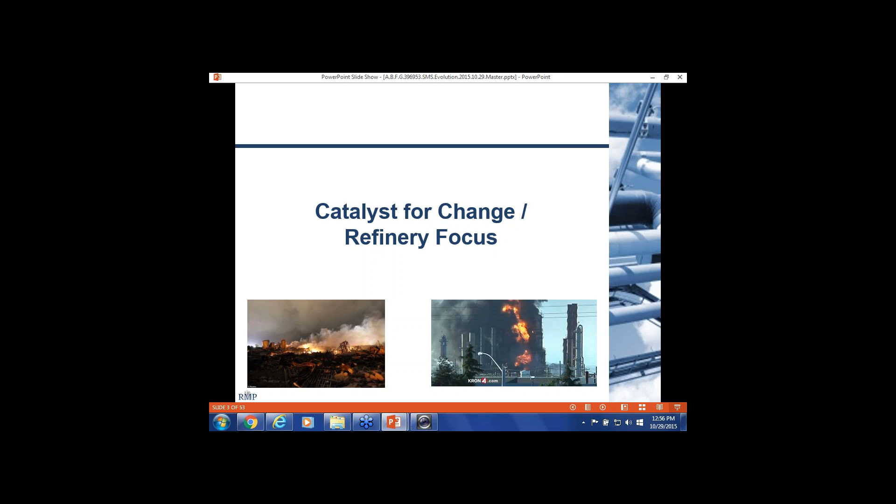All these things need to get looked at over time. The West Texas event and the Richmond refinery fire were just the catalysts for doing that. It was probably something that has been in the background for a long period of time, and that's just the focal point. What I'd like to do is talk about two key platforms for where these things are coming from.

First of all, as I mentioned, there are 3 CSB reports. The first one came out fairly quickly. I was going to say from an agency perspective, it takes a lot of time to get approval on these, but still in 2013, CSB came up with recommendations already for some of the key deficiencies in management systems that they perceived or what could be considered areas for improvement.

Additional PHA requirements regarding safeguards effectiveness, inherently safer systems requirements, damage mechanism hazard reviews is what they called it at the time. Coordinating regulatory programs, leading and lagging process safety indicators, and also a multi-agency involvement in California regulatory environment. All these should sound familiar because that's a key fundamental aspect of what's going on right now with the CalARP and also the PSM changes in California.

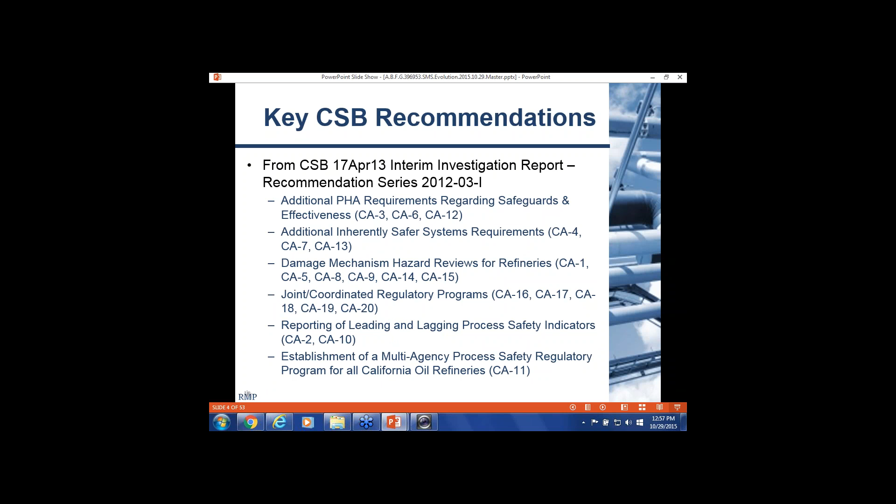In 2014, the second report came out from the CSB that was focused more on regulatory issues. There was a recommendation for restructuring California PSM regulations. You're seeing the results of that right now. Augmenting the PHA to include hierarchy of hazard control analysis, damage mechanism reviews, and also making sure MOCs trigger a fresh look at inherently safer systems. All those are being brought forth in various fashions in the CalARP Program 4 and Cal PSM 5189.1 documents.

Regulatory personnel review, make sure that there's technical competence in the review of those things. PHA audits and inspections by the regulator, workforce participation, making sure information is reported to the public, and also regulator funding were all part of this regulatory report done in 2014. Also in 2014, looking at leading and lagging process safety indicators. You saw that earlier, but this was a different emphasis. And also, again, regulator compensation and funding.

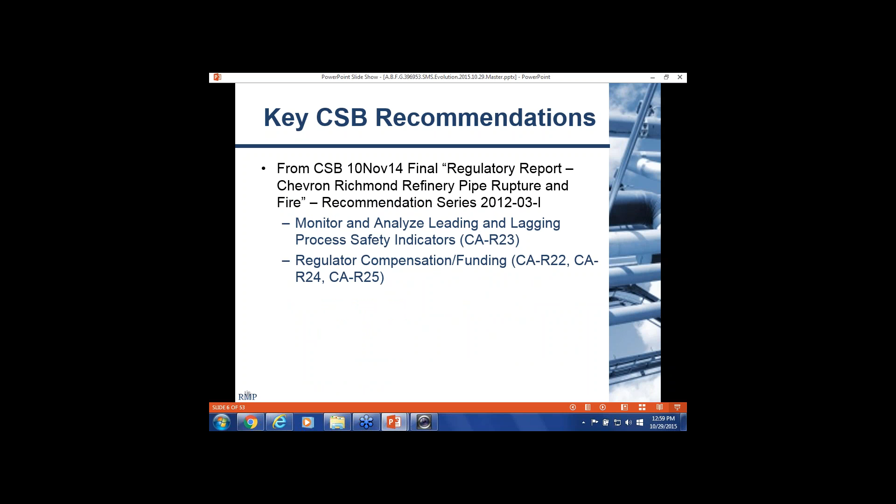In early 2015, early this year, there was the final investigation report. A key part of that was focused on damage mechanism reviews and mechanical integrity of basic equipment. By that time, the CSB had looked over various API reports and guidelines addressing specific corrosion mechanisms that had been part of the Richmond refinery fire initiating event in 2012, looking at various damage mechanisms. So all these different API recommended practices, they took a fresh look and said, well, look, these need to be updated to address these things, and there needs to be better application of them.

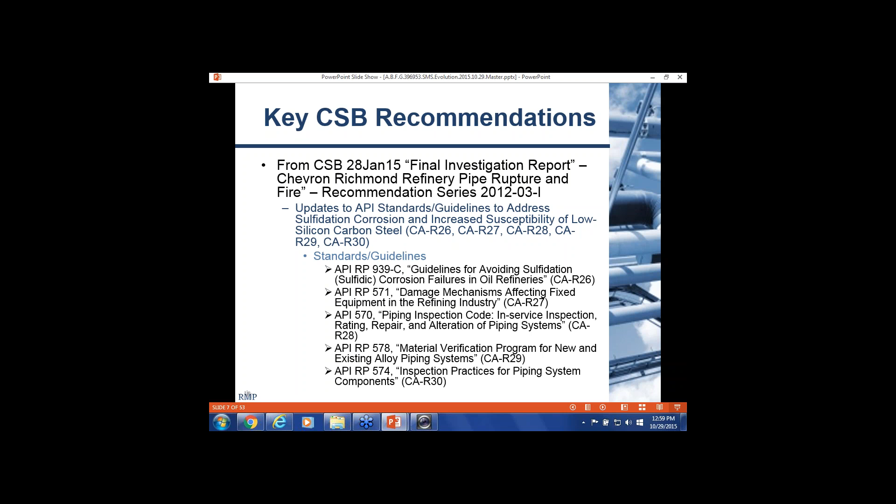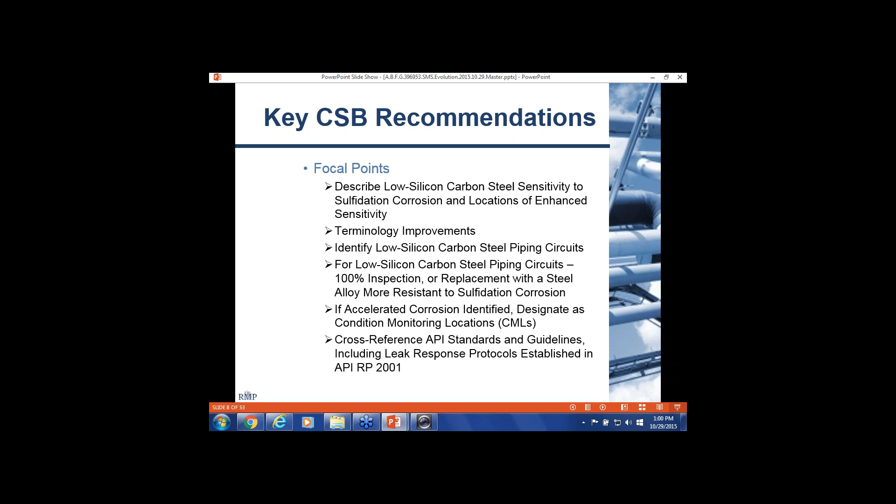And I've made a list here. That's also in your presentation materials for your reference. The key focal points from the CSB are the low silicon carbon steel sensitivity, improvements to terminology, looking at other metallurgy and corrosion mechanisms, and basically bringing this into play in the guidelines and also applying them better at facilities. Other recommendations were with respect to emergency response and also repair of equipment and piping. All these things also came out in the last report from the CSB.

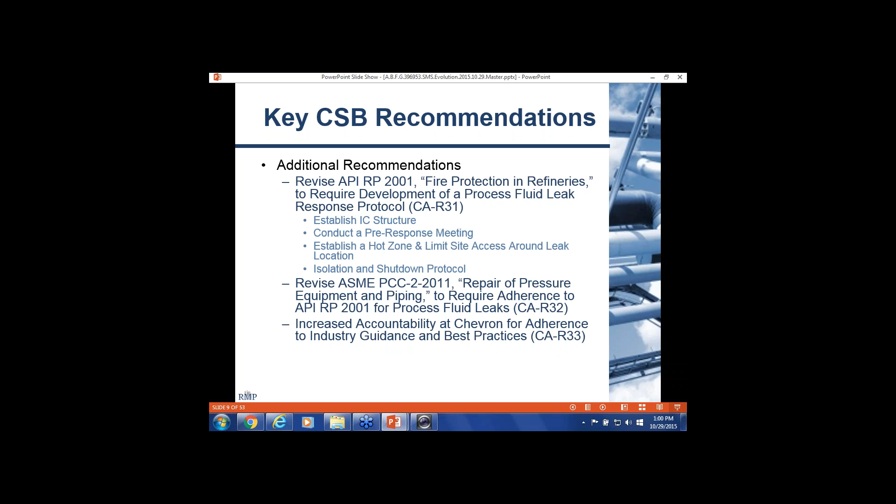Auditing and taking a fresh look at things at specific refineries, having an approval process at Chevron for resetting the minimum alert thickness to a lower value, that's alert thickness on piping or equipment. Again, specifically designed to address the sort of things that were perceived as deficiencies that led to or at least contributed to the August 6, 2012 event.

All right, so all these CSB recommendations, when you take a look at it, really provide the catalyst or impetus for change, and a lot of those changes are now being manifested in CalARP and the CalARP Program 4 and CalPSM documents. Also, the Interagency Refinery Task Force worked together.

That's those dozen-plus agencies that get together and are formulating the updates or helping CalOES, CalEPA, and CalOSHA formulate the changes to these programs. And they also put together their own report to look at the CSB recommendations and also a fresh look at other things and recommend the basis for the changes that are being made to the regulations.

Again, they focus on inherently safer systems, process safety culture assessments, damage mechanism hazard reviews, root cause analysis, human factors issues, and also make sure that safeguards are effective as part of the process hazard analysis. Other recommendations from the IRTF were annual compliance audits, increased frequency of agency inspections, it should say UPA now, it was CUPA at the time, and also an evaluation of the risk management plan on a triennial basis.

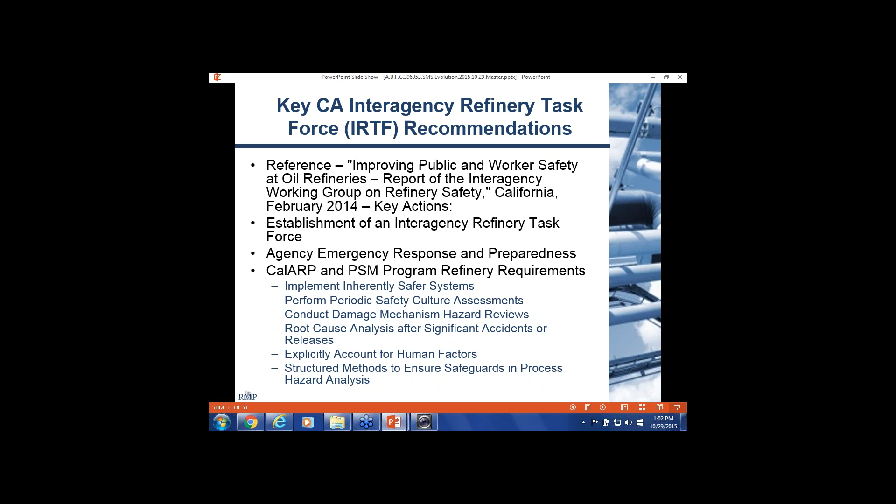Community education and alerts, and also agency enforcement, capacity, and reporting for refineries were also part of the IRTF's outcome that they published and is used as the basis for the CalARP and CalPSM changes. So that is the essence for what drove the changes, and what you're seeing right now in the CalARP Program 4 and CalPSM documents are a reflection of that.

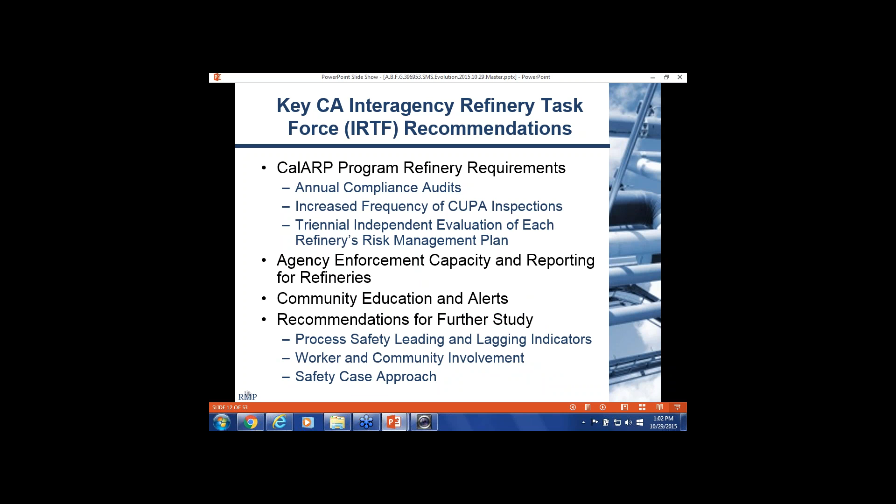And so what I'd like to do is look at each of the individual elements. Before we do that, I'd like to go ahead and identify where things are going. As I mentioned, at the federal level, they're still processing comments, so there's nothing that you need to act on associated with changes to PSM or RMP from the federal level now. Now, the problem is that it's going to be desynchronized with your state programs, but given that the federal requirements are much simpler, that shouldn't cause too many complications.

For CalOSHA, CalOSHA did issue on the 24th of September the latest draft of their PSM requirements for petroleum refineries, 5189.1, and the CalARP document in its entirety was updated with the key changes being Program 4 requirements. That was also done on September 24th. Again, even though there are differences, the section numbers are different, some of the elements are subsumed into different categories, specifically DMR, a lot of the agencies are working together to try to minimize those differences and at least have the technical essence of it synchronized.

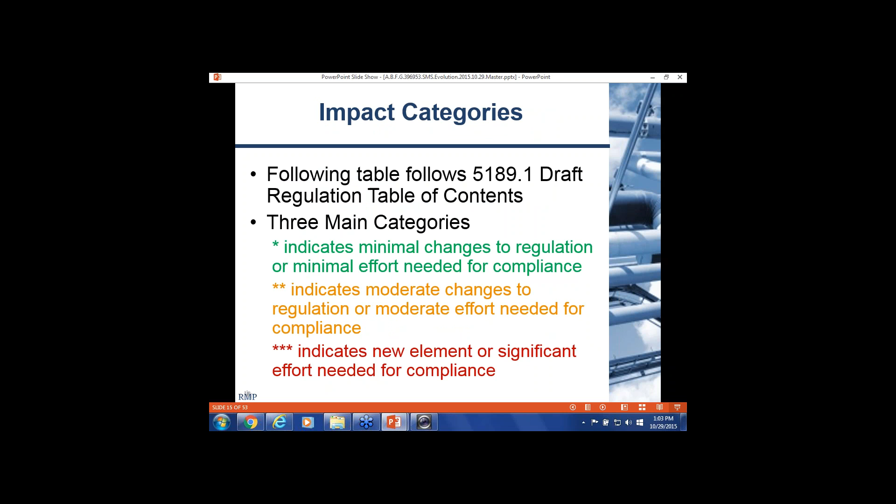I did provide a table of the different section numbers and importances that is provided as part of your presentation package. Again, it's color-coded associated with how much effort you need to spend on it, or at least anticipated effort, and depends on everybody's program, which is different. Yours may be better in some areas or not as good in other areas. The green items are things that you wouldn't expect a lot of effort on. The orange and red are things that you should pay particular attention to, with red especially.

The safeguard protection analysis, if you're not doing LOPA, or something else to validate the effectiveness of safeguards, that can have a big impact on what you do for your PHAs. We'll talk more about some tips on how to address that shortly. Damage mechanism reviews, again, there's a lot of ways to do this, but there's also a lot of things that you can do right now to minimize the amount of work that you have to do later.

Hierarchy of hazard control analysis, it's the same thing. Looking at inherently safer systems and how to improve the fundamental process at your facility can have a big impact, but especially if you're bringing new systems online right now, doing some work at this point can save a lot of retrofit or rework later. Process safety culture assessment, human factors, and management of organizational change, and also the management program itself, also things that could result in a lot of extra effort at your facility, and you want to pay particular attention to.

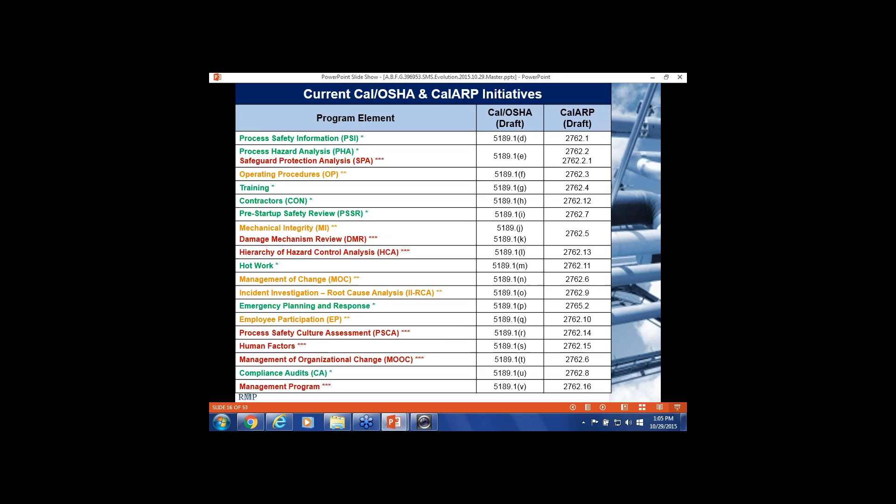All right, so with that overview, what I want to do is go ahead and turn it over to Jordan, who's going to start going through some elements. I'll pick up where he leaves off, and then we'll keep proceeding.

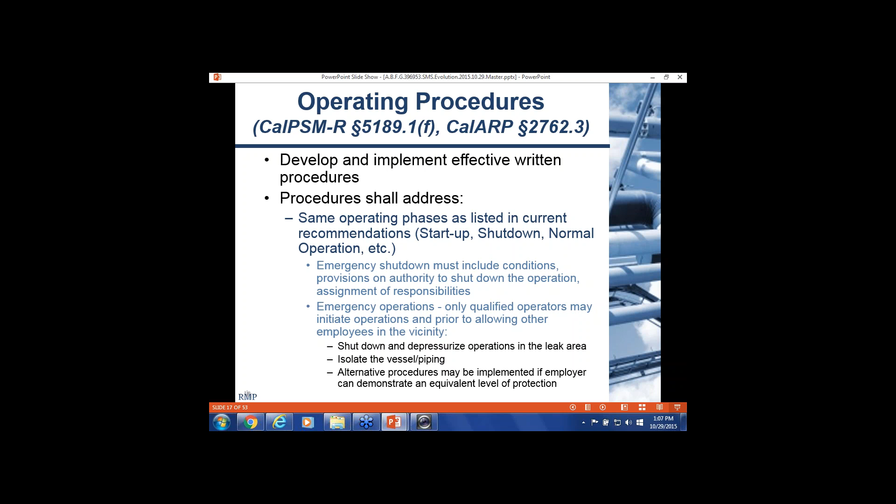Also, you've got to address operating limits. This is something that's kind of intrinsic in what's already in there. You have your operating limits as part of your PSI, but make sure they're actually on your operating procedures now. You're documenting the consequences of deviation, the steps required. This can all be done pretty effectively via one table, say like a matrix where you go, high pressure defined as blank. What happens if you hit that high pressure? This. Steps required, troubleshoot.

Safety and health considerations. This is once again part of your PSI, but the basis of that is that personnel don't always read through the entire CalARP binder. I know this is probably shocking to everyone that's actually involved in this program, but operators will look at the operating procedures, especially when they're first starting out. They want to say, here's what you need to know about ammonia, hydrocarbons, etc. What PPE do you need? That way they know all of this. Safety procedures, unique hazards, etc.

And also, what are your safety systems? Okay, you've got your PSVs. What are those set at? What is this alarm set point? So that way everything is all in one document rather than going back and forth between your PHA, your PSI, and your operating procedures.

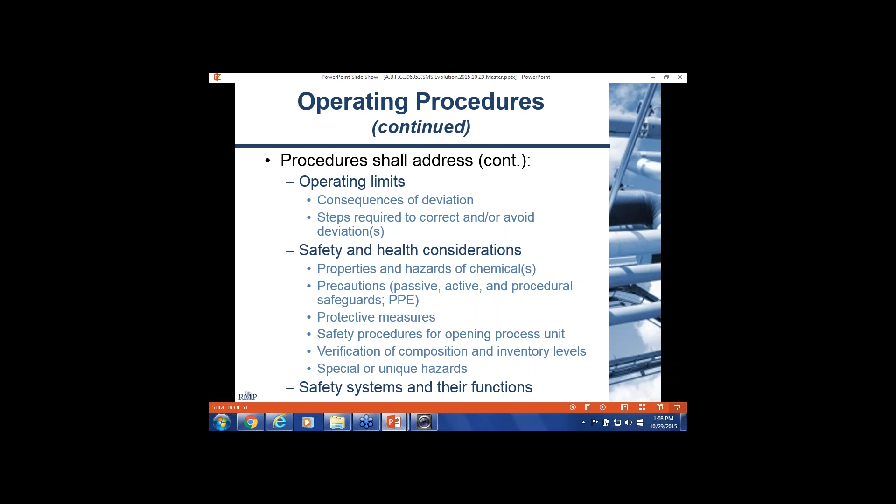A copy of procedures shall be readily accessible. This is a common practice, but it is explicitly called out. And you need to review and certify them, like we talked about earlier, annually, but they also say as often as necessary. If you're doing turnarounds, things like that, obviously you need to look at the way you're doing things. Whenever changes occur, same sort of thing. They want to make sure you're reviewing these not just annually, but whenever it's applicable. And develop, implement, and maintain safe work practices. This is explicitly called out as well.

Another one that is particularly different: control over entry at hazardous work areas. This is sometimes one that isn't really covered under safe work practices traditionally. Obviously, LOTO, confined space, and opening process equipment always is. But handling, controlling, and stopping leaks, as well as that control over entry into the areas, sometimes isn't always covered.

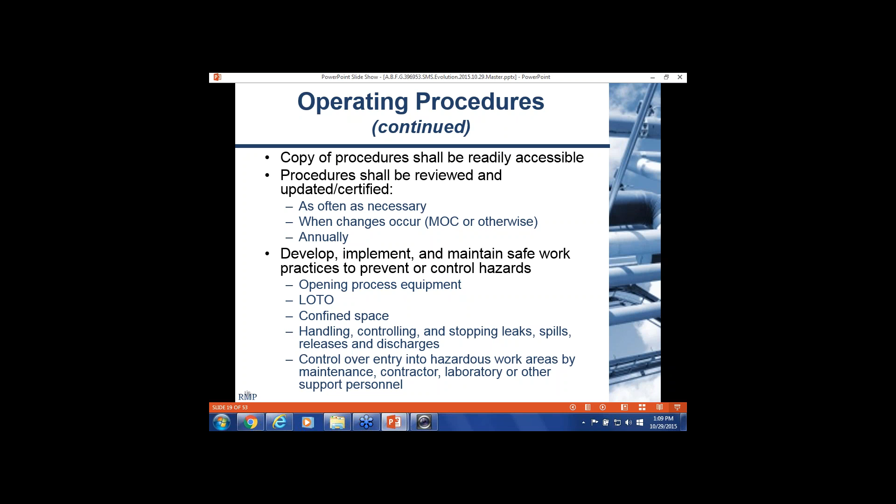Employee participation. This is already something that's in place, but they add quite a bit to it. The written plan shall provide effective participation of operating and maintenance employees in the PHA, DMR, once again, we're going alphabet soup on you, HCA, MOC, MOOC, PSCA, Incident Investigation, SPA, and PSSR.

Essentially, this is kind of intrinsic in the process, but they're calling it out that you really need to make sure that you're bringing people in as much as you can. And not just that, but also making sure that they're involved in the upkeep of that program. They don't really want this to be the refinery manager holds on to that book and only he touches it and he might shoot an email down.

The regulation is looking to get kind of a ground level to the top level involvement in the program. Also, you have access to all the documentation. Even if you do mark it as a trade secret, employees are able to access that information.

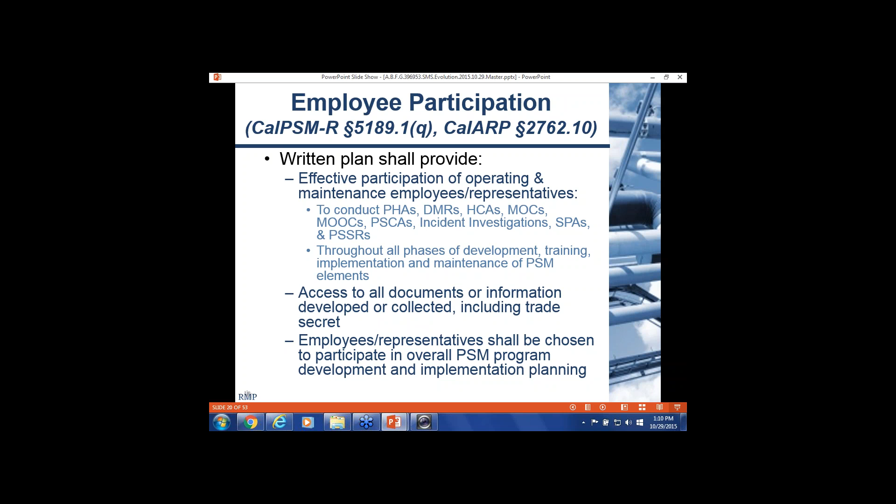The major change in the employee participation would be establishing a stop work authority. This came out of the SEMS regulations that Steve talked about, the offshore industry. Essentially, it's under the same idea. You can't be in the refineries with the pressures and the temperatures that you're working with and wait to call the refinery manager. Sometimes you just need to be able to make an immediate judgment, knowing operator experience, and bam, just kick down the system.

Also, employees may refuse work based on safety and health concerns. Having said that, you need to make sure you're documenting why you think this is an unsafe condition, and then it's relayed on to management. It's not just you can't get out of doing your operator rounds because you don't feel like doing them because safety. But once again, you can recommend to the operator in charge. That clear line of authority comes in: hey, this is unsafe, shut it down, and then that operator in charge is able to shut down that system without having to go further up the chain.

Also implementing an effective hazard reporting program. Most people already have this in place, but all employees may anonymously report hazards in writing. And this is pretty common, but this does also put in a 30-day notice period. Once that manager or whomever gets the report receives it, they have to respond in writing why they are doing something or are not doing something regarding that reported hazard.

And they also have to keep a metric on work refusals, reports of hazards, shutdowns, and actual shutdowns. Basically, keeping metrics to say, hey, look, we have a lot of reported concerns. Nothing's happened, but maybe we need to look at what we're doing. Or we're reporting a lot of potential shutdowns, or we actually are shutting down the system due to concerns a lot. We probably need to review something.

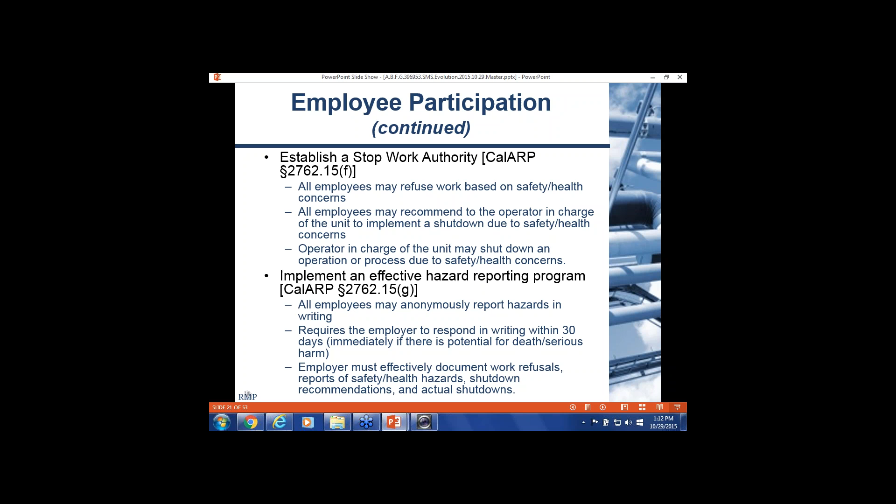Management system, once again, this is already in place, but it has changed pretty substantially. Reviewed and updated at least every 3 years. You're developing annual goals, writing policies and procedures, tracking and documenting all changes to the program, which would include recommendations. Implement and maintain programs to document process safety performance indicators. I'll talk about that here in a bit. And then also doing an annual report certification containing information on those PSPIs.

What does this all mean? They want to make sure that management's much more involved in that safety program. Instead of just being the person that signs the binder, they want to make sure that you're actually having those meetings and that you are actively involved in the upkeep and the overall condition of how your program is going. Once again, the CalARP, this is where they've actually put the stop work authority and hazard reporting that I was talking about earlier. It's just an organizational difference, but there's nothing in the actual process itself that has changed.

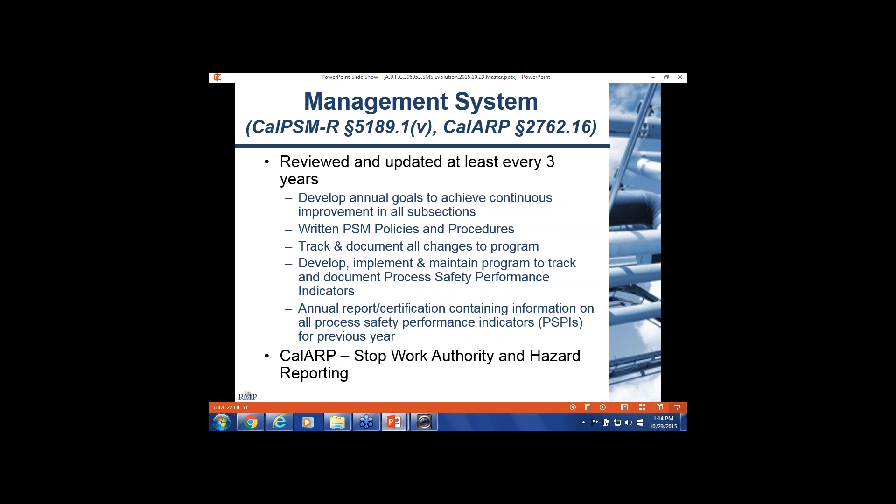The PSPIs that I was talking about come out of the CSB's monitor and analyze process safety indicators. They changed the name a little bit, but essentially this is a list of common ones that they had already called out in the regulation: past due inspections of process piping and components, past due inspections of pressure vessels, past due recommended action items, leak seal repairs on utility systems and the dates installed, the number of major incidents that occurred in the calendar year.

Having said that, they also will request that you develop a site-specific list. Personally, if you're looking into doing something like this, CCPS has process safety metrics, and API has API 754. They give you a big, broad list of how to develop these kinds of programs, as well as ideas on what you could look into. CalOES also plans to put some of these indicators and updates on everything, and then you're reporting to CalOSHA on a monthly basis.

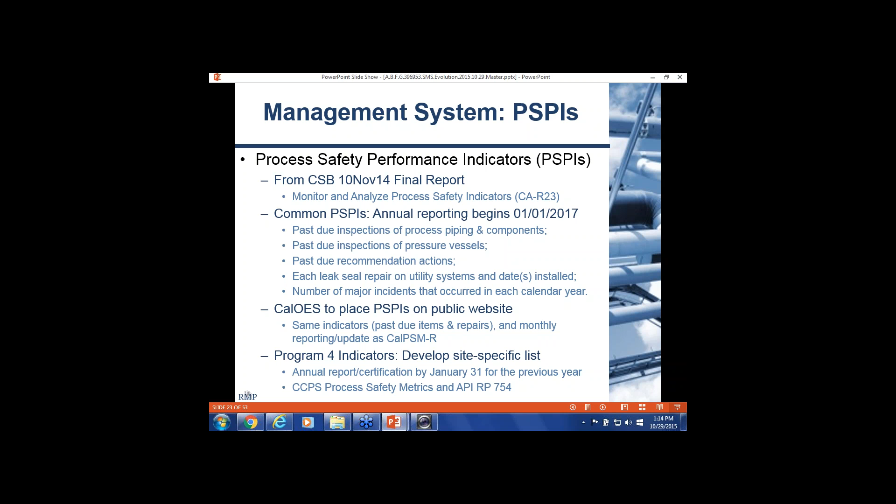With that, I'm going to bring Steve back up. He's going to talk about PHA and some of the items that can be related in there.

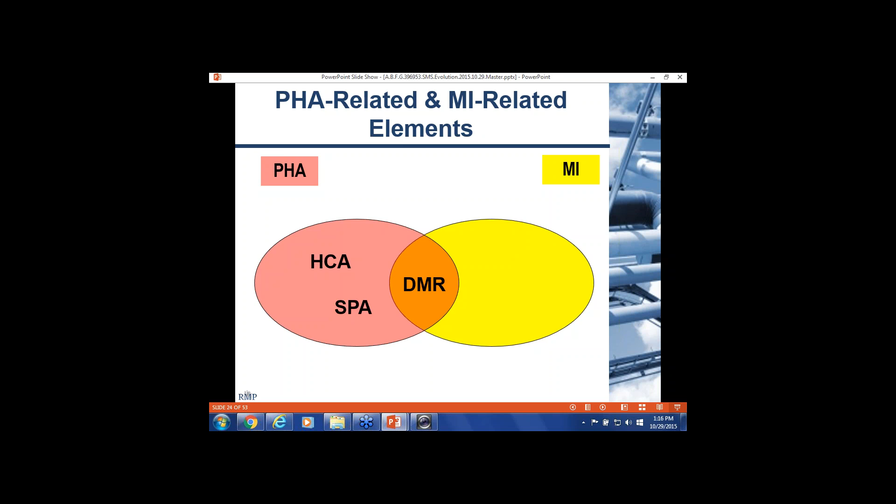First of all, let's talk about PHAs. The PHA sections have been rewritten to make sure that additional areas of the refinery are encompassed by PHAs. So there's less argument about, gee, should I look at this area versus that area? Is it covered or isn't it covered? The PHAs have to address damage mechanism reviews and their recommendations, hierarchy of hazard control analysis and their recommendations, external events, incident investigation findings. A lot of these things are getting wrapped into the PHA.

And really, PHAs are probably one of our more popular services. I don't know if popular is the right word or not, but most people call us in for doing PHAs. It's something that can be farmed out to an engineering contractor like ourselves, and it's the sort of thing that, if it's done properly, can really encompass a lot of the different safety issues that come up at a facility.

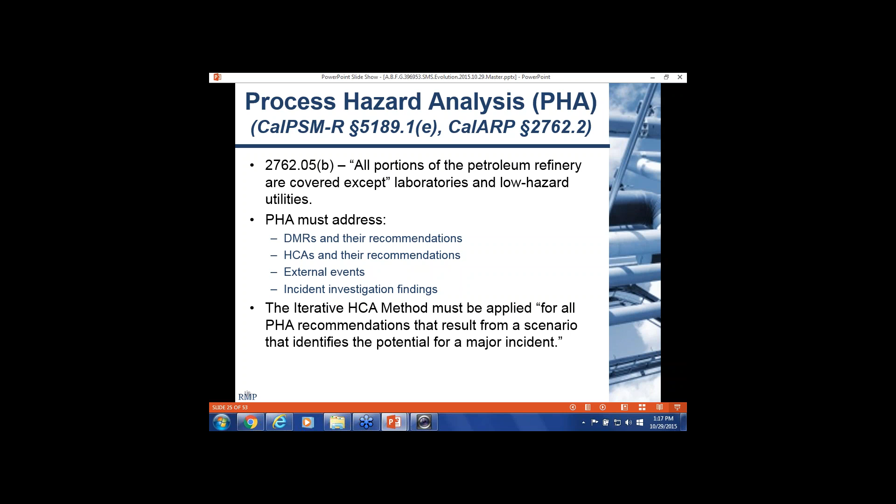Also, as part of the PHA, you've got to apply an iterative hierarchy of hazard control analysis method for all PHA recommendations that result from a scenario that identifies the potential for a major incident. So again, they're trying to blend these different areas that revolve around PHA and make them specifically covered as part of a process hazard analysis. Recommendation closure process and timing has been clarified at the state level. We did discuss that as part of Kern County's requirements earlier during the panel discussion.

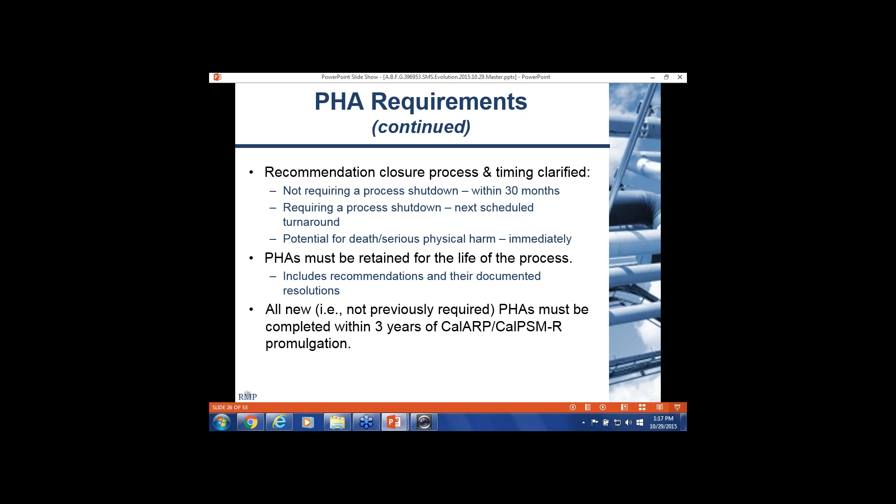PHAs must be retained for the life of the process, and new PHAs must be completed within 3 years of the promulgation of the new CalARP or Cal-PSM requirements. So there's a specific timeline set forth for making sure a little bit more near-term action for PHA is done for new portions of the process. Actually, new portions of the process and processes that existed but now are required to do PHAs.

So what I want to do is talk about safeguard protection analysis. SPA, Jordan mentioned it, is now encompassed in the PHA sections of the new CalARP and Cal-PSM documents rather than being a separate section. The objectives being to verify the effectiveness of safeguards, to make sure you've assessed effectiveness for each failure scenario and make sure the safeguards are independent of the initiating event.

Now, for those of you who do a good job with your PHAs, you'll know that these are fundamental tenets of how you do a good PHA. You want to make sure that safeguards are truly independent, that you're not taking credit for something that's really not an independent safeguard that will do a good job controlling the event or mitigating it should an initiating event occur. And you want to make sure they're effective. If they're not effective, why do you list them?

Well, we get involved in a lot of revalidations for things that other people have done, and there's a lot of junk out there, to be honest with you. There's a lot of folks who've done a poor job and just randomly list safeguards. A lot of times it's because the facilitator doesn't have a good handle on the process, the petroleum process.

And because of that, when they hear somebody on the team yell out a safeguard, it sounds good, they just write it down and they don't really critically challenge the team to make sure that it's actually effective, that it's actually independent. And we'll talk more about that in a few minutes.

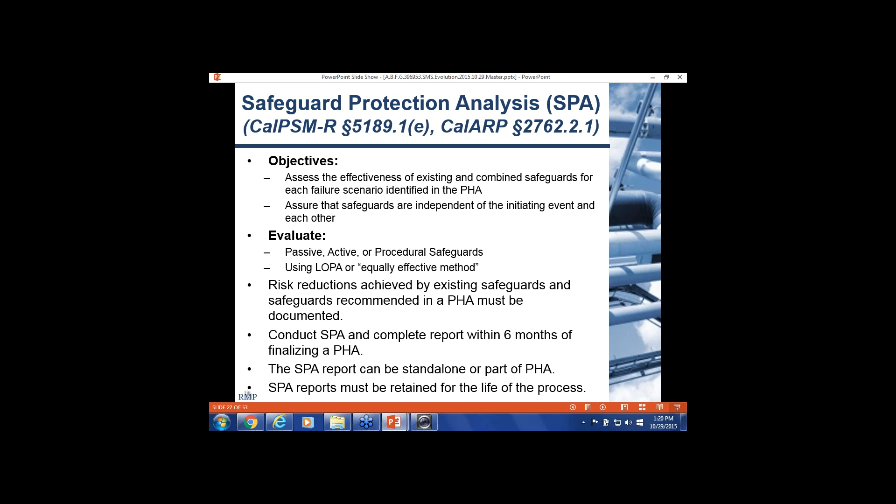But there's a perennial challenge when doing PHAs in the first place, and this shows up as part of safeguard protection analysis. It's human nature to blend issues. When you talk to a PHA team and you say, well, can this ultimate consequence happen? They'll say, nope, can't happen. You start probing and challenge the team, and they will eventually say, well, it can't happen because we've got a high-level shutoff.

Well, that's a safeguard. So it's really human nature to kind of blend these issues together, and you've got to be really careful to keep them separate. And if you apply that as part of a best practice, you're well on your way to doing a good quality safeguard protection analysis.

The challenges also are common mode failures. How many of you, when you're having your PHAs done or you do them yourself, are very careful about identifying transmitters as part of the causal event or safeguards? Oh, I was hoping to see more hands. Okay, that's a best practice, and there's also a good reason for it.

I wouldn't say one out of 10 times or even 1 out of 100 times, but it's not uncommon that when we start listing the actual transmitters as contributory towards the initiating event, and also separately as transmitters that are required for the functioning of the safeguard, oh wow, we've got the same transmitter. Whereas a lot of times it's not obvious.

In a lot of cases, your P&IDs don't have as accurate indication of the control and protection functions as you'd like. And when you force yourself in the discipline of listing those things, and it doesn't require a lot of extra work, you really pick up potential common mode failures. So these are challenges in that the P&IDs may not be totally accurate. The engineers on your team may not totally understand the interaction between control and protection systems, et cetera.

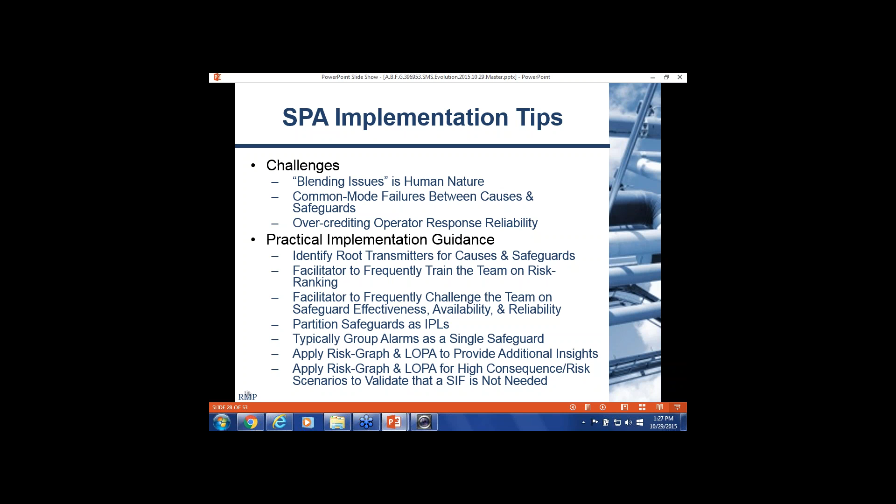Other implementation tips: we talked about operator response to alarms. Again, if you're doing best practices and start doing them now as part of your culture at the facility, it's not going to be a lot of effort to verify that you've addressed the requirements when they do come out.

Mechanical integrity. All right, there have been some changes in general, and I'll be focusing on DMR. The substantive changes have been minimal. There's not a big discontinuity with current industry best practices. There's some additional specificity on documentation, clarifications on records retention, and also references to RAGAGEP, but not a whole lot of direct requirements other than the areas that were perceived as a problem for the August 6th, 2012 refinery fire. So let's talk about DMRs.

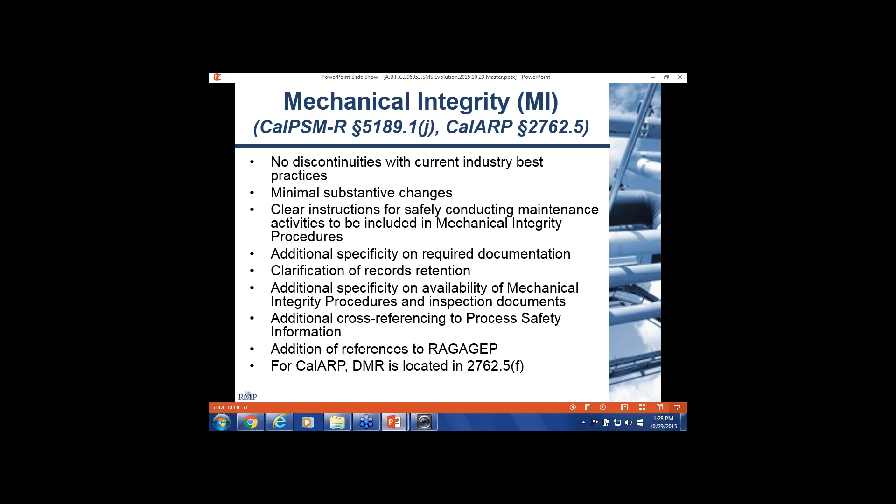Okay, damage mechanism reviews are designed to look at damage mechanisms, mechanical, chemical, physical properties, such that you can degrade materials or have potential problems. There's a requirement to do it prior to PHA and prior to any changes that affect chemistry, metallurgy, or operating limits. There's a timeline set forth on when you need to do that and things that can trigger re-looking at your system and doing a DMR.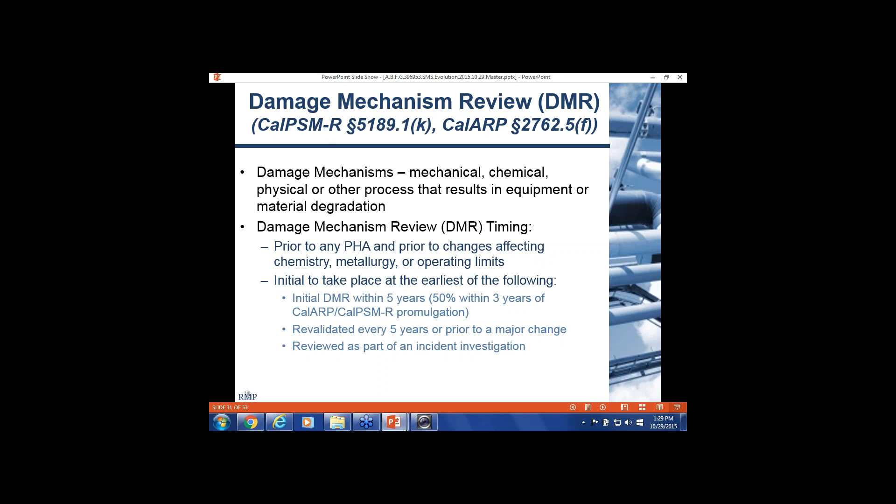There's some specific failure modes that are identified. Obviously, you want to cover those requirements. Go beyond that to look at other requirements that may apply to your specific process. Keep in mind that PSM, CalARP, RMP are all performance-based standards. So you have to decide what depth you need to go to and what you need to look at. But DMR requirements as written specify certain failure mechanisms that are common and focused on refineries. And also DMR reports must be retained for the life of the process.

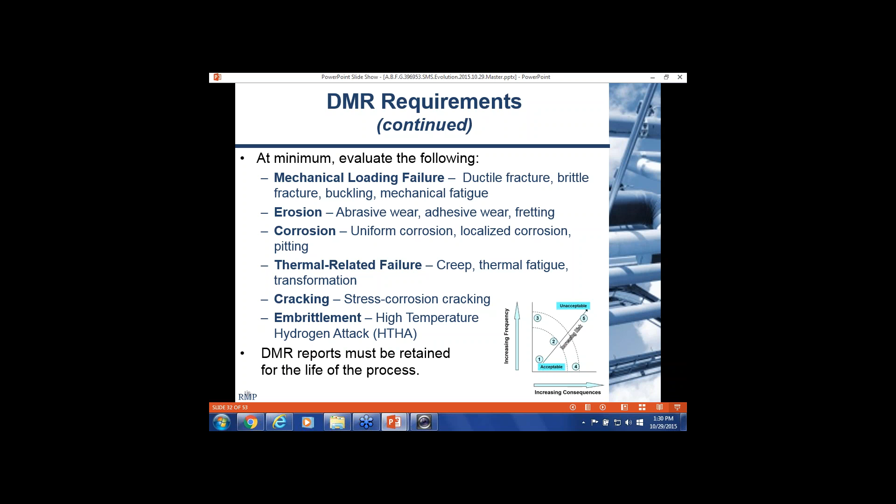In the lower right-hand corner, I've got a little picture of probability versus consequences and looking at the risk contribution for scenarios. Whether you're looking at a PHA, when you're looking at valves opening and closing, or a DMR, when you're looking at containment of equipment, piping being compromised, those are all scenarios. You're always looking at the likelihood of the scenario and how bad it is. So there's a lot of overlap here. When you're doing DMR, do the same thing. You don't have to be doing extensive effort on things that are relatively inconsequential. So you always want to keep in mind the potential risk contribution.

So let's talk about implementation. You talk to individuals, whether it's in the regulatory community or industry, you get a whole lot of different answers about what DMR is going to require. There's a whole range from enhanced contemporary best practices. Best practices right now are doing corrosion studies, having corrosion specialists review them. There's some things in DMR that can be addressed by enhancing those, by specifically having your corrosion specialist involved in your PHA, by having the corrosion studies look at conditions of temperature and pressure which may have exceeded the specified conditions for the process and maybe shortened equipment life. Those sort of things can be done as part of enhancements to current practices very easily, and that's something you can do right now.

What we like to do when we can convince a client to allow us is we usually recommend a prioritized DMR approach. Basically, for each scenario, make sure that you're sensitive to the material specifications of piping and equipment, and you're looking at the pressure and temperature excursions, either high or low. Low temperature can be a real problem with respect to embrittlement. So you're looking at high or low temperature and pressure and taking a look at the piping and the equipment and comparing it to the specifications. Well, that's something that's very easy to do, requires minimal additional effort, and really cuts at the core of what you're trying to do for DMR. That can be done on a scenario-by-scenario basis.

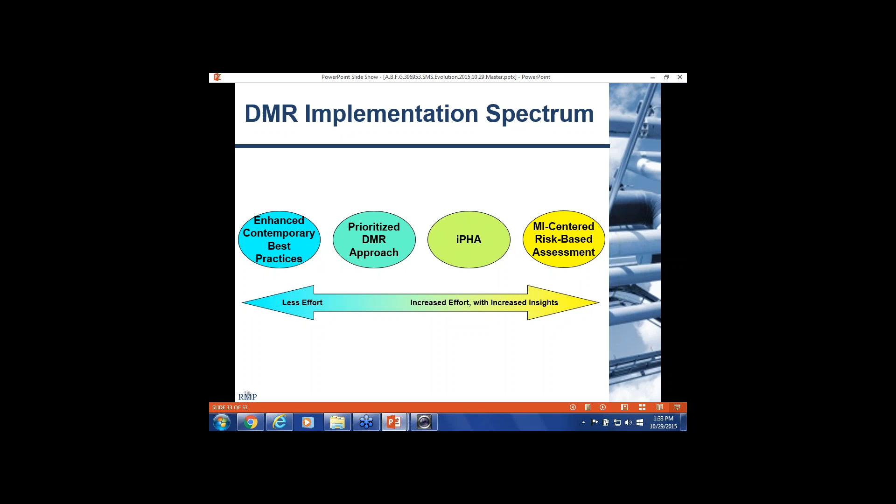Setting out implementation tips. There's a variety of different ways to do this. Don't forget PSM, RMP, CalARP, performance-based standards. You have to decide what you need at your facility. You've got to obviously meet regulatory requirements, but you also need to make effective use of facility resources. If you're spending a lot of time and effort addressing nuances that aren't that important, then it's taking resources away from something else. So you really want to keep an overall balance in mind.

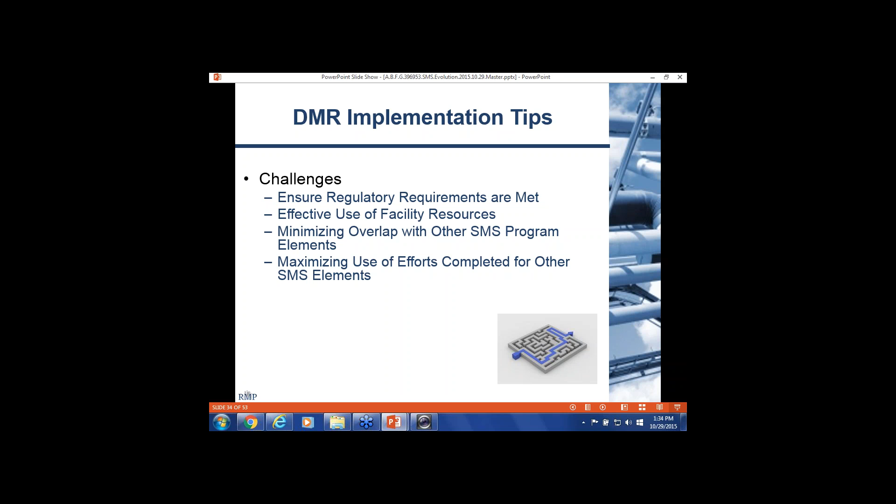You also want to minimize any overlap with other safety management system program elements so you're not doing the same work twice. And also, if you're doing some work, take advantage of it. If you've done some really enhanced corrosion studies and you can use that as part of your PHA, great. Go ahead and use it. Again, in terms of suggested approaches, I did review that.

Keep sight of your long-term objectives. Do something right now to bump your program up so that you're comfortable that you're getting a good bang for your buck, that you're getting some good value and return on your investment for the analysis work you're doing, but move towards your DMR requirements.

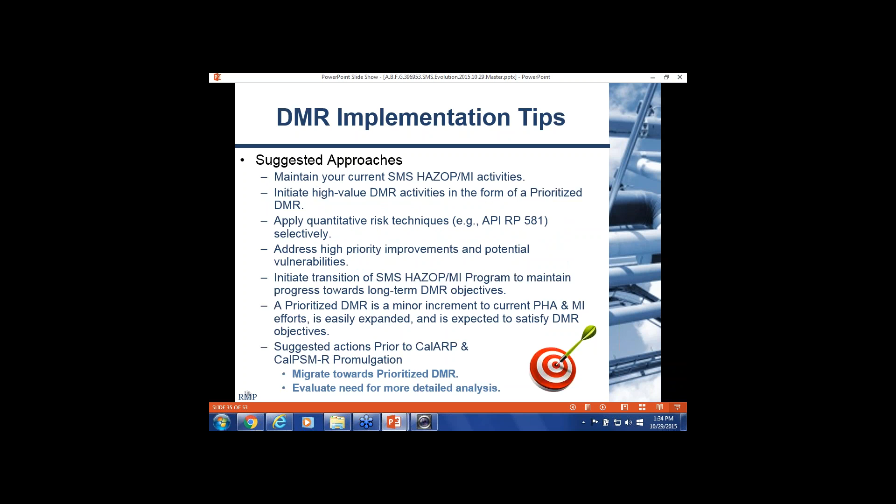Okay, so let's talk about hierarchy of hazard control analysis. For most facilities, this isn't going to change what you're doing very much or make a lot of drive towards major modifications in your process, but it is a requirement and you need to be sensitive to it, and there are things that can potentially come up and bite you in the rear on this.

First of all, there's a requirement for ranking of prevention and control measures prioritized by first order inherent safety, basically safer chemicals, things that can prevent an incident in the first place. Second order inherent safety, reducing inventory or reducing the severity or likelihood of the incident, or adding additional independent protection layers, safeguards that can provide some inherent level of safety.

There's a requirement to conduct the hierarchy of hazard control analysis for all existing processes, for any PHA recommendations that could have a major incident potential, major changes at the facility, we'll talk more about that in a couple of minutes, major incidents that may have occurred, for new processes, and there's been some wording, I don't know if it's in the current September 4th edition, but in previous editions of the PSM and CalARP requirements, there was a requirement for making the hierarchy of hazard control analysis available to the public. And also, if your unified program agency requires it, you also need to do a hierarchy of hazard control analysis.

The objective is to reduce risk, of course, and you'll identify and evaluate inherent safety measures such as control techniques or management systems that have been achieved in practice or been recommended for petroleum refinery and related industrial sectors. The approach is an iterative method, and the outcome is the employer is required to select and recommend first and second order inherent safety measures unless you can document that they're infeasible.

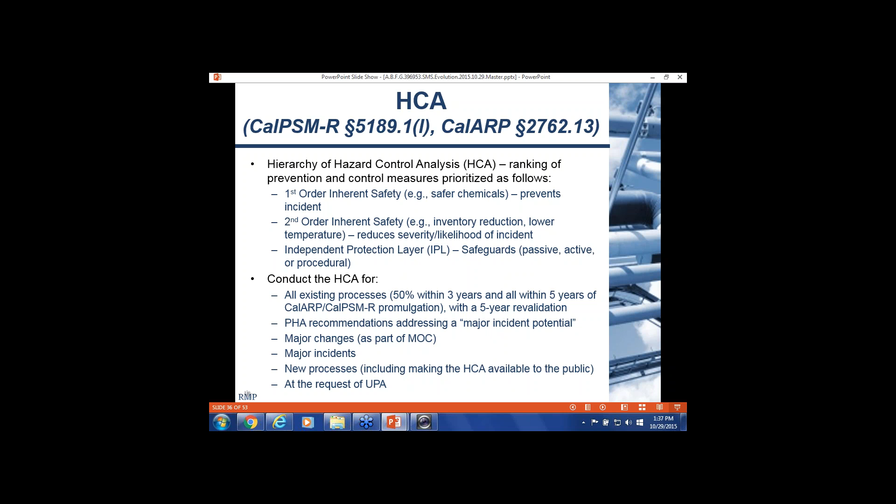There's a lot of discussion on that right now, and risk management professionals made some comments to the folks who are writing the Cal-OSHA requirements with respect to maybe consideration of some benefit cost analysis or some other comparison to risk on these items, because we see this as an area that could be very contentious when you're looking at certain refinery processes. There's a requirement for hierarchy of hazard control analysis to be a standalone and to complete the report within 90 days of completion.

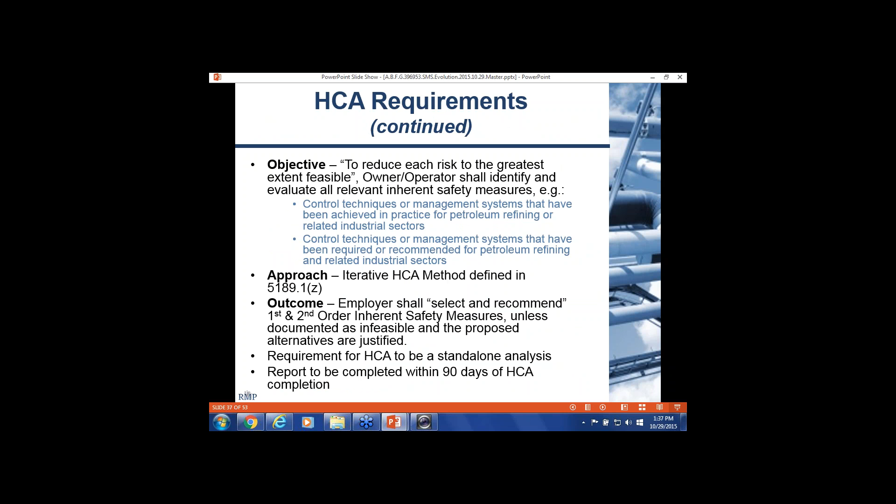Let's talk about implementation. First of all, safer systems evaluations. You've seen checklists. You've probably looked at these or applied them at your facility. One of the things we like to do is start out, when we're doing a PHA for a refinery, really any process, with some sensitization training. As part of the sensitization training, we want to identify what inherently safer systems hierarchy of hazard control analysis is all about, and what they should be looking out for.

Talk to them and list out the basic considerations such as minimizing materials, substitutions, moderation, or simplifying the systems. And then for each node, we want to go ahead and document that we've looked for inherently safer characteristics. There are checklists out there also to look at the entire process as part of your PHA. So these are things that you can do as part of training, looking at it on a node-by-node basis and documenting that you've evaluated it as a team, and also applying a checklist. So these are things that you can be doing right now.

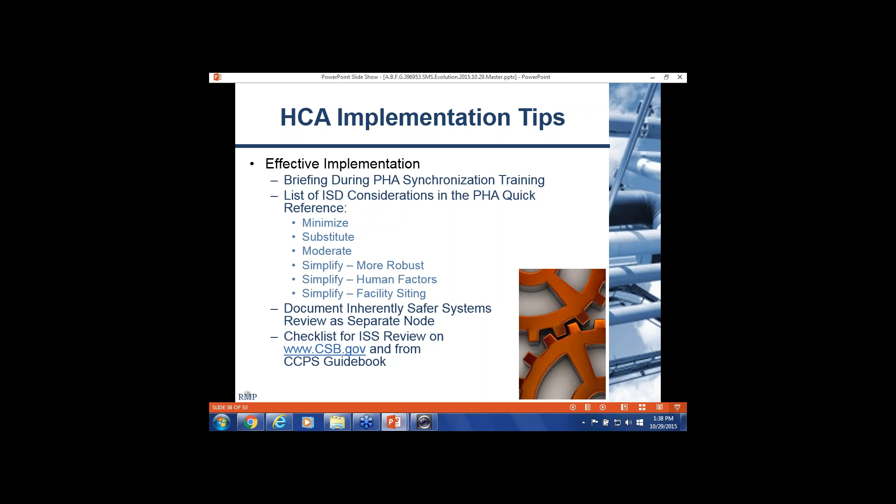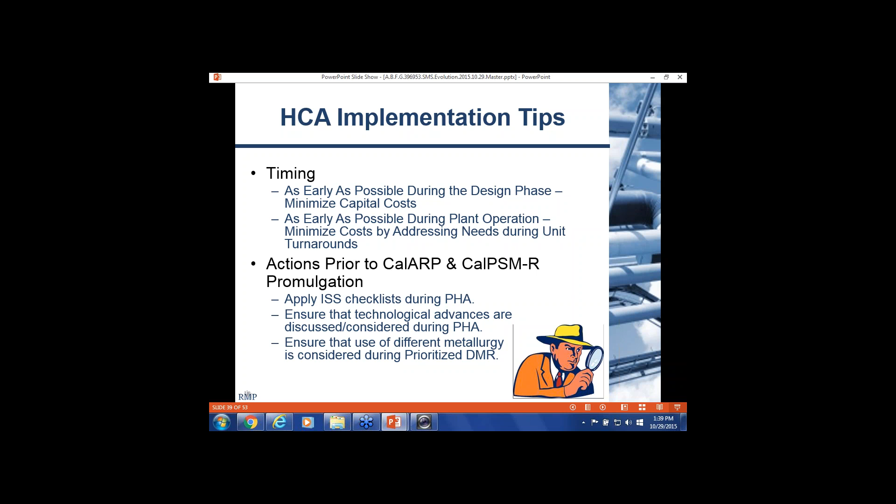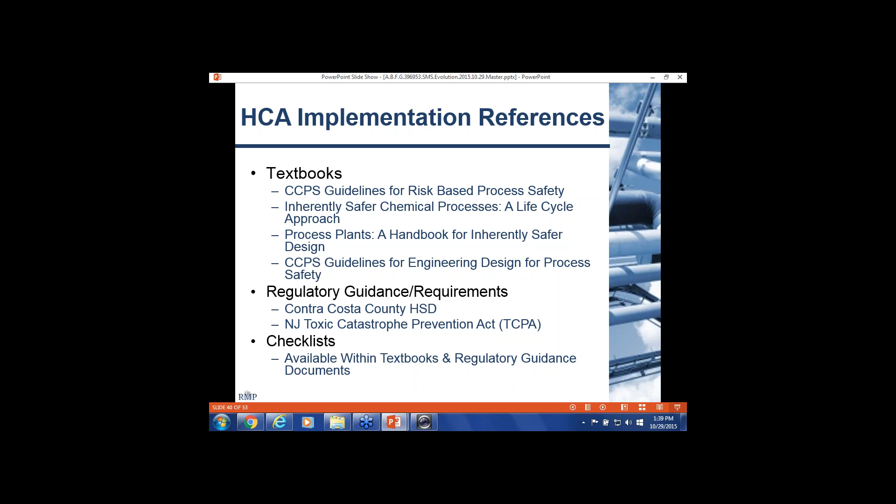There's a lot of references out there. There's various textbooks on inherently safer systems that apply directly to hierarchy of hazard control analysis. There's regulatory guidance. If you look at Contra Costa County's websites and the TCPA website, you'll see specific checklists and guidance for doing HCA. And again, there's checklists out there that can help you out. In most cases, a checklist is going to do a good job as long as you approach it in the spirit of really thinking about it and challenging the team. Have they looked at inherently safer systems?

So with that, I'll turn it over to Jordan, who will address some other elements of the new requirements, and then I'll come back for closure. Thank you, Steve.

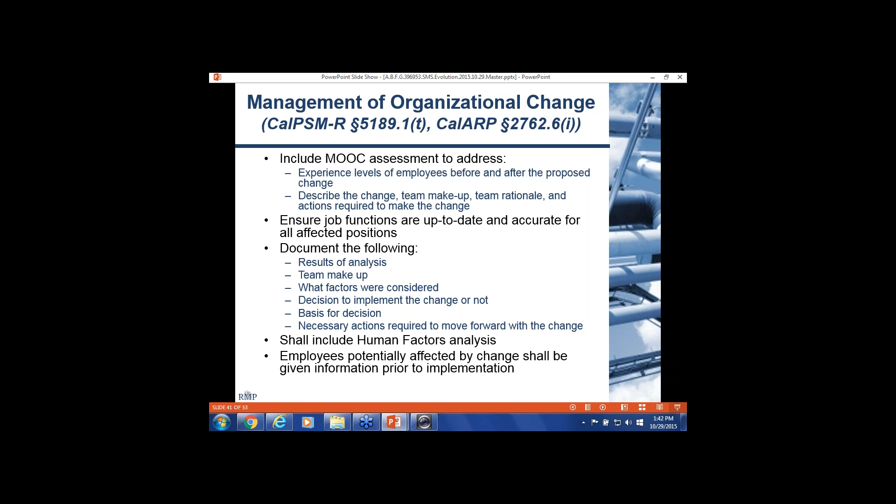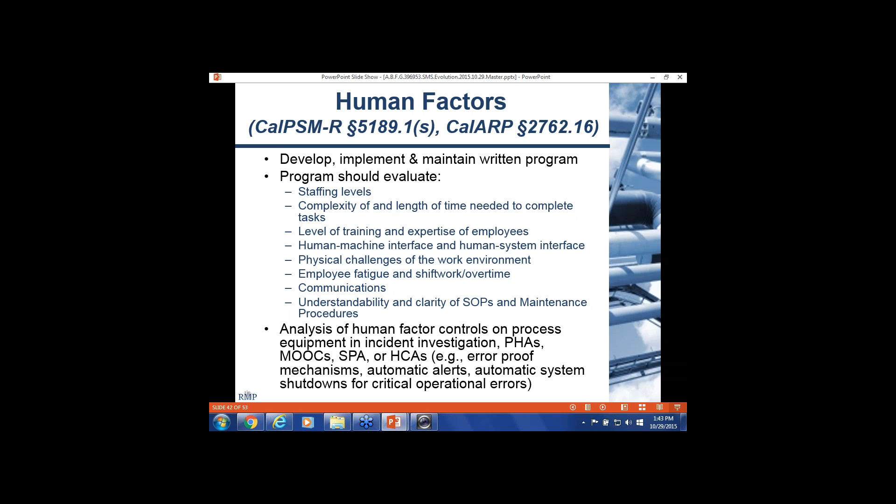Analysis of human factor controls on process equipment and incident investigations, PHAs, MOOCs, SPAs, or HCAs. Looking at it, basically making sure that it's as good as it can be, like error-proof mechanisms, automatic system shutdowns for critical operational errors. Also assess human factors in the new SOPs and maintenance procedures, as well as the existing ones. Revise those procedures accordingly. Make sure that you've assessed 50% within 2 years of the effective date of the regulation, and then the rest of them within that 3-year window.

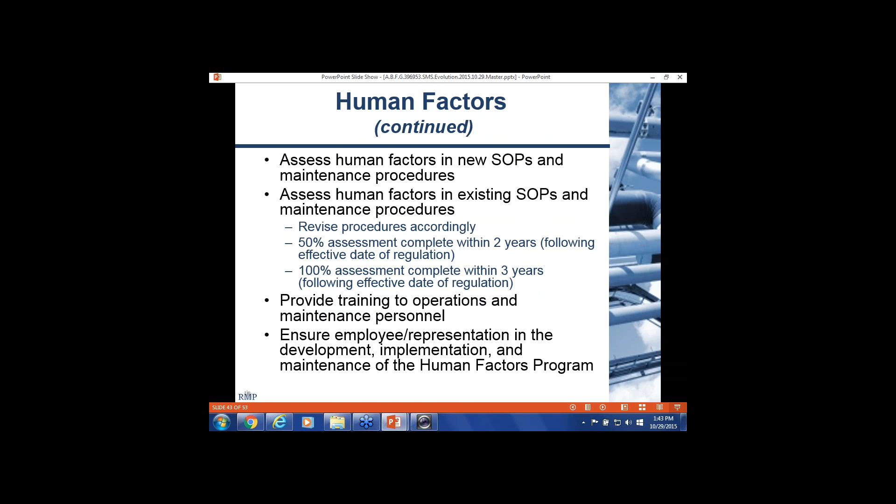Provide training to operations and maintenance personnel, and ensure that people are represented when you're making that human factors program. Incident investigation, you guys know all about this. The big difference being here, they are going to explicitly require you to use root cause analysis. That team member has to know root cause analysis.

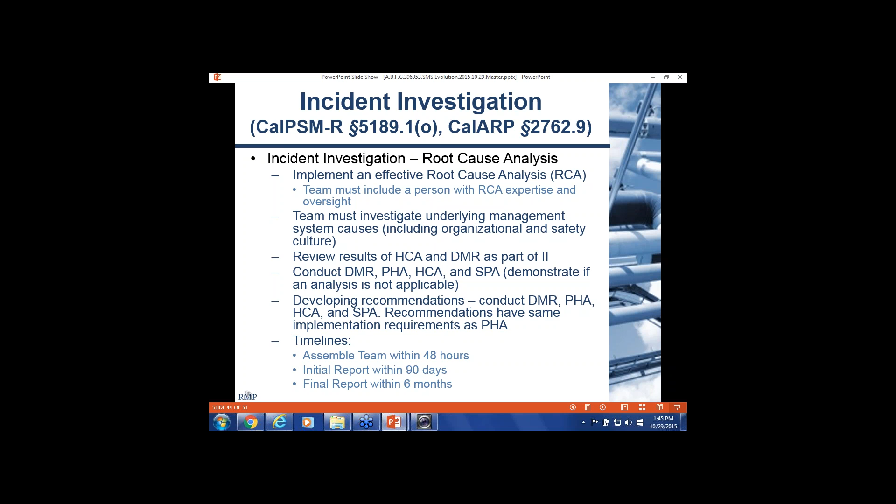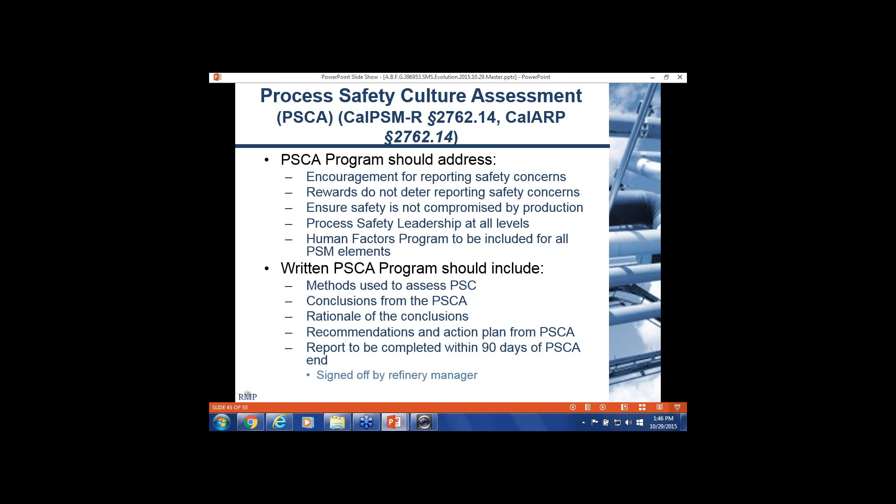New regulatory updates, we'll talk about implementation. There's a little bit I would like to note on that later, but new regulatory updates from OSHA. I can see quite a few familiar faces from earlier, but we'll go ahead and talk about it one more time. RAGAGEP enforcement, recognized and generally accepted good engineering practices.

OSHA wants to give you a little bit more guidance on what they want to say is RAGAGEP. Usually when I'm auditing programs, people will just say, oh yeah, the system is designed, operated, maintained in line with best industry practice or some sort of canned wording like that. But there's no documentation or evidence to show that is happening in line with industry best practices.

The retail exemption, from an oil and gas standpoint, this isn't nearly as big of a deal as it was earlier today in more general industry. But if the facility doesn't fall under NAICS codes 44 or 45, it's no longer eligible for that retail exemption. A lot of people from, let's say, fertilizers were saying the farmer was the end user, so we are just a retail facility, and thus we aren't PSM covered. So there's a lot of Program 2 fertilizer facilities that have 200,000-300,000 gallons of aqua ammonia.

Also talking about aqua ammonia, the covered concentration: use the EPA's 1% policy rather than the commercial grade that is currently being used. Aqua ammonia doesn't fall under this, so don't worry quite yet. What they're talking about there is the chemicals that aren't already covered by a specified percentage. Usually they were saying commercial grade, but they realized that's very difficult to enforce, from what commercial grade means. And they are supposedly coming out with more interpretation letters.

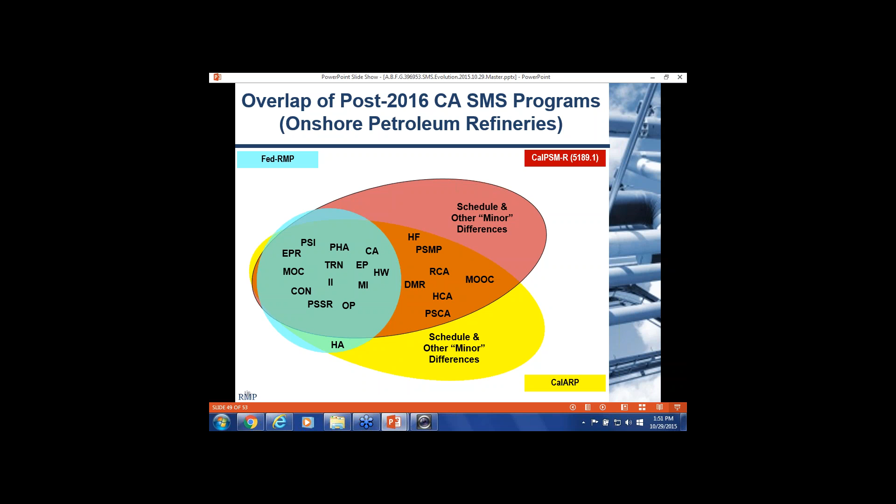There are some resources out there. Don't chase your tails on this. There's a lot of books, publications. We've done a lot of publications at the Global Congress on Process Safety. We do a lot of webinars. A lot of that information is readily out there, in most cases free, on how to handle all these various new elements and do them effectively at your plant site. There's help out there. Go ahead and get it.

Most of the stuff, at least the stuff that we post on our webinars, it's all free. A lot of the papers at GCPS are very, very useful for addressing a lot of these new elements. And even if it goes down to the very detailed DMR items, we did do a paper like that at the Global Congress on Process Safety and a specific webinar. All that stuff's available. I provided you with the link before, and it's also at the bottom of your screen here. So there are resources out there for handling these things.

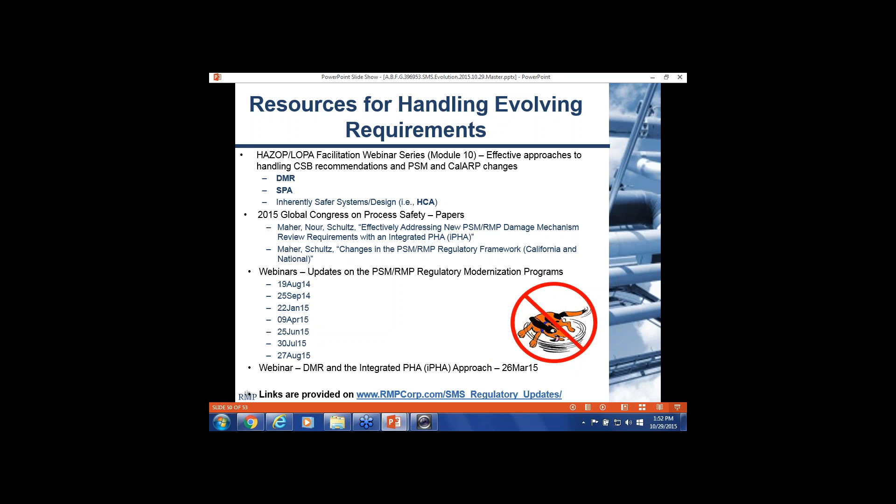Just be aware of where you're at right now. The California agencies have taken a fresh look at these programs. California is moving ahead with this. The federal agencies are in the process of looking at these programs, and probably looking at what California does too. The current focus is California and petroleum refineries. However, don't stop there and don't ignore what else could be going on.

If you're part of a large oil and gas company and for whatever reason, for regulatory requirements or because you're doing something proactively in California, you ought to be able to explain why, if it's important to do for California, it's not being done elsewhere at your other assets, maybe in other parts of the country. There's a potential for these becoming best practices that can be expanded to other highly hazardous facilities in California or outside California, even for other petroleum facilities, petroleum refineries, or even non-refineries.

So you need to be aware of this even if you're not directly involved or these aren't direct requirements for you right now, or that will be at the end of 2016 for California petroleum refineries. Again, as I mentioned, with CalARP and Cal PSM a lot of improvements have been made to harmonize and synchronize those two. There's going to be more long-term movement towards that. And we try to offer some tips. There are relatively easy things that you can do right now to make progress so that when these things are promulgated, you're not shortchanged on resources or time in terms of getting things done.

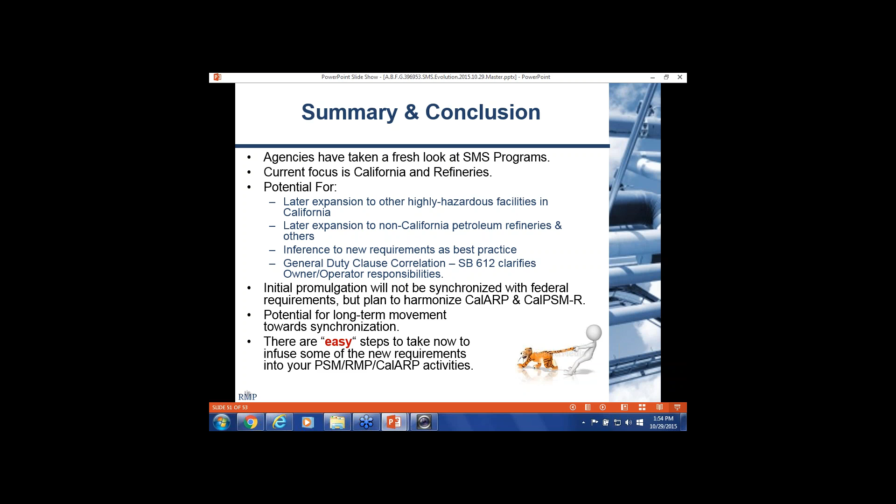The little figure of the tiger by the tail, it is a potential tiger by the tail. Don't let the teeth get you. There have been recommendations from regulators, and it also makes sense: if there's something important to do that's a high value item or is easy to do as an extension of your current activities, now is a good time to do it, because you're going to have tighter resources and a schedule for completion at a later time. And again, some of these elements, as I mentioned before, for hierarchy of hazard control analysis, are best done as early as possible during the design phase.

So if you're making any changes at your facility, doing your inherently safer systems analysis / HCA for your new process now can save a lot of pain and suffering later on if there's something fundamental that needs to be changed that could be a lot of money later but minimal cost now. So you want to carefully monitor these modernization programs. If you're responsible for your facility, focus on the long term. Chart the course of your programs at your facility and make sure that you develop a strategy for effective implementation.

Don't play ostrich. You're not going to close your eyes and this stuff isn't going away. It's been documented, it is coming up. There's a specific schedule in place. I don't see major changes coming forth for a lot of these requirements.